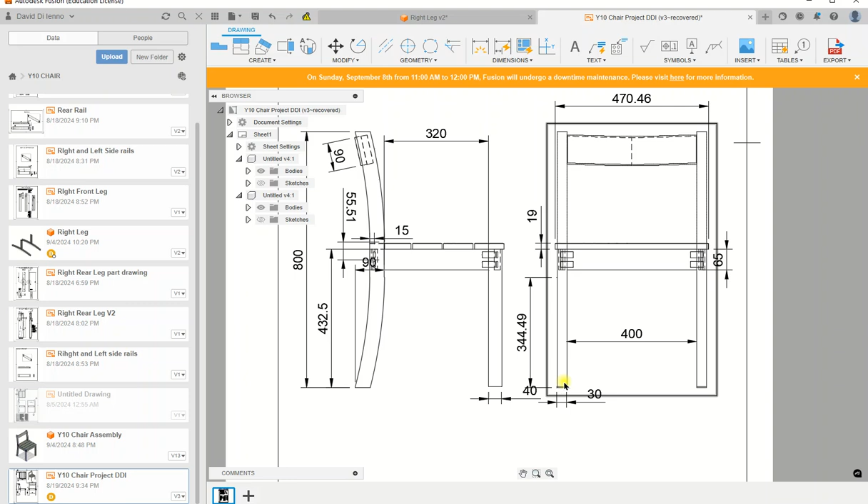Okay, we're moving on now to create the two front legs of this chair. The chair front legs, as we can see from our 2D design, are 40 millimeters on their widest face, 30 millimeters in width, and 432.5 tall from the top of the side rail to the base of each item to the floor. So 432.5, remember that, and 40 by 30.

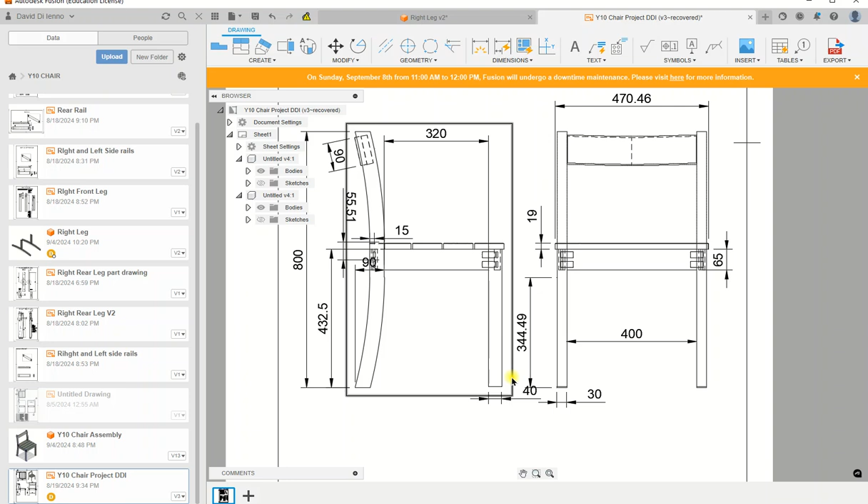Okay, so let's go back and let's do it. Now, some things are probably going to get in our way. We don't want to look at them all the time.

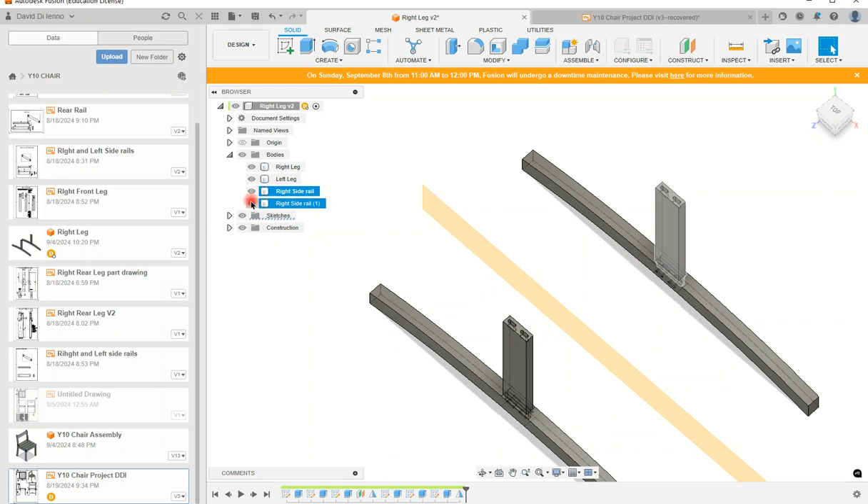As you highlight them, you can see how they highlight on the side here on the menu bar. Let's just turn them off so that we're not looking at stuff that we're not interested in. So we're not interested in that, turn it off and it disappears. Click on the little eye, you'll turn off that leg, and then I think we'll leave this leg on here. Alright, so we're going to do a sketch on this surface over here.

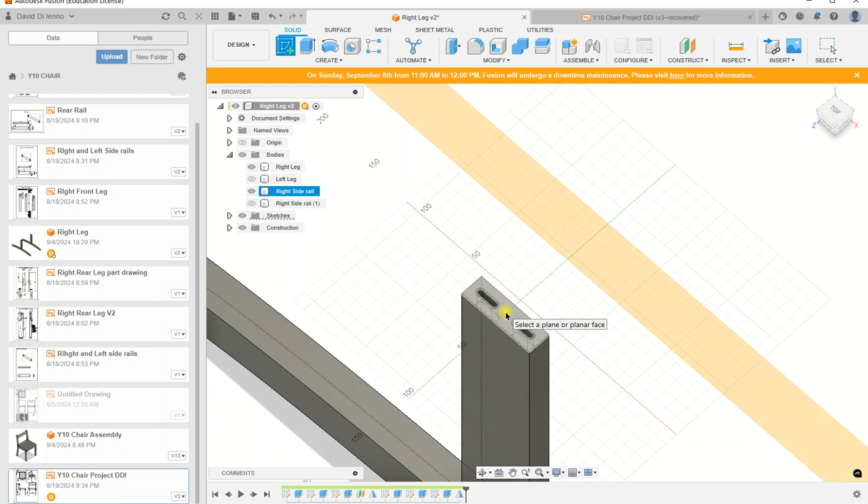So let's highlight it with a sketch. Click on sketch, then where do you want to sketch? I want to sketch on that surface, and now you're in 2D view, which is good. And we know that the front leg is the same width as the rear leg. So we're going to create a 2-point rectangle.

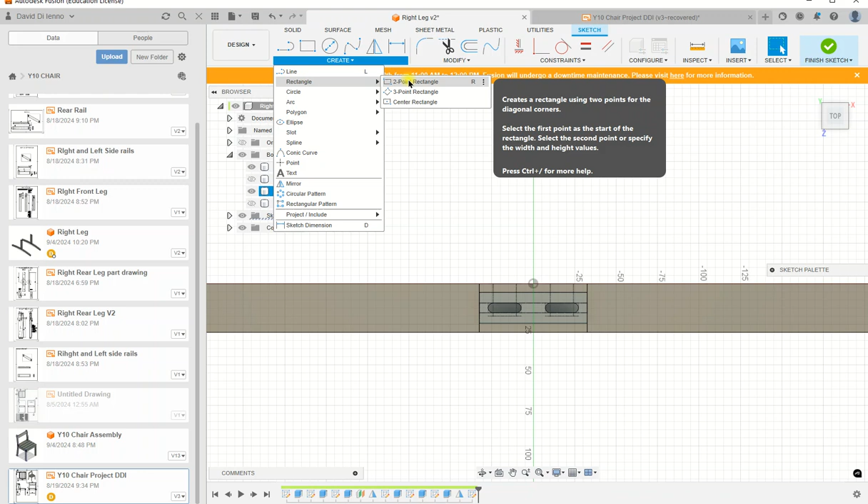That's it up there, or go here, rectangle, 2-point rectangle, which means you select either vertex, the edges of the rectangle, and drag out. So select 2-point rectangle, start up in one corner, and we're going to drag across. Now I don't have to go to the end, because I'm going to tell it how far.

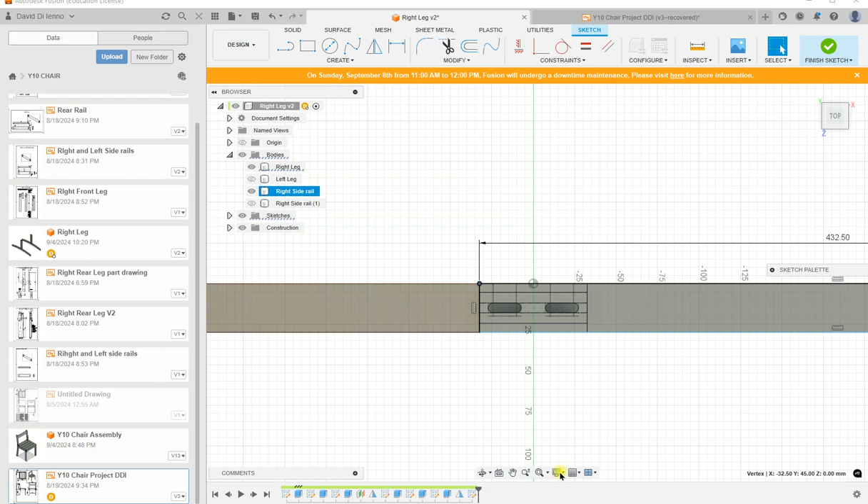Remember, it was 432.5 - that was the length. So hit the tab key and you go to the vertical dimension, and that's 30, which is exactly correct. So hit enter. So what we've done here now, if you click on the fit button, is we've created a shape which reflects the profile of the leg, and it's centered because we're modeling it top down.

Okay, that's good. So now what we need to do is extrude that shape. So let's go to solid, extrude, select the shape. Now of course we also need to select the inner part in here - that's part of the shape. So hold the control key down and select it with your left key so you can select all of the blue shapes. They're all going to be extruded.

We're creating a new body with this, which is important. So make sure you're not joining it, because if you join it, you'll join it to this, and then you won't have a different part. Fusion will think they're all one part. That's not what you want to do, because you want to mirror this part later on, not the whole thing, because we've already got side rails. So make sure that it is a new body that you're doing.

Okay, and then we're going to tell it to go upwards. And do you remember how thick it was? Yep, you're right, 40 millimeters. There you go, and click OK. See how it's changed to join? Be careful with that. That changed there by itself.

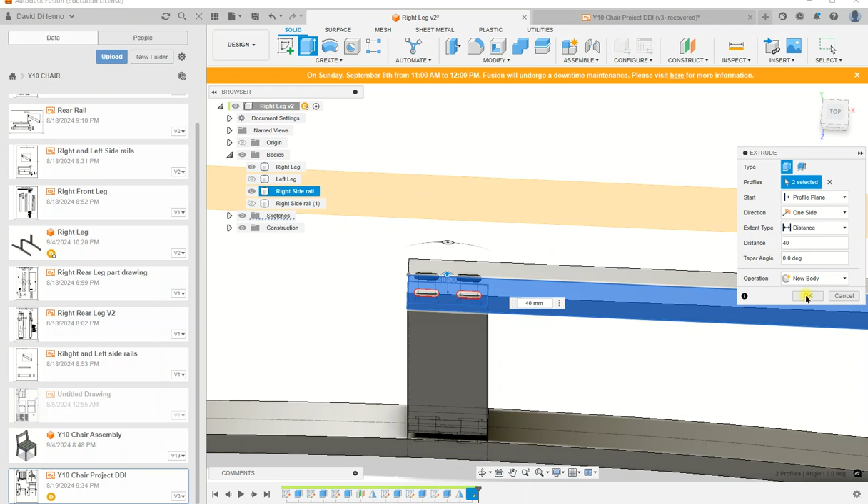It decided that it thought joining this rail to that, this front leg to that rail, that was the idea. Don't let it do that. Make sure it does new body. You'll have problems. You can separate them if you do happen to make that mistake - I'll give you the little clue on how to do that. Go to modify, and then you'll have split body, and you can split the shape. But just avoid that for the moment, there's no need for it.

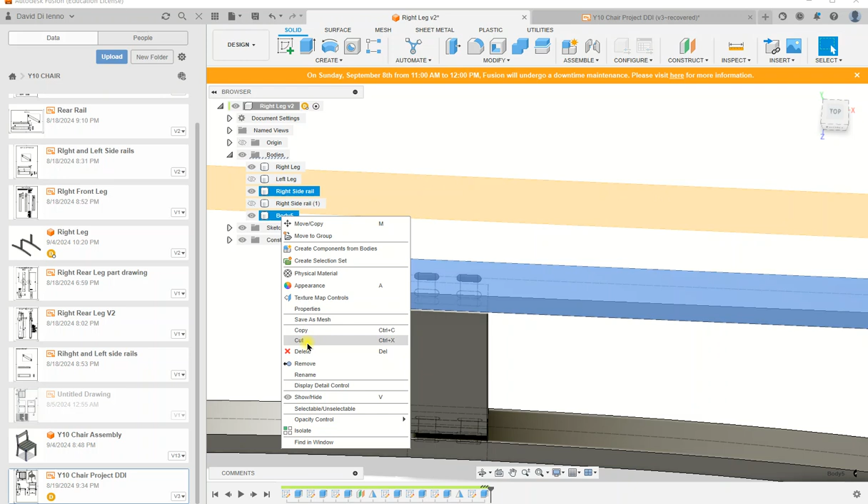So we just created a separate body. It's called body 5 here, and I'm going to rename it by just selecting it with the left button and right clicking, and I'm going to find the rename function. Always name your parts - I'm going to call it right front leg. It'll get confusing if you don't name them, so just get in a good habit of naming all your parts, especially when you get a more complex design.

Now we've got a problem here. We've got these through dowels - see if they've gone all the way through? We don't want that. So let's fix this up now.

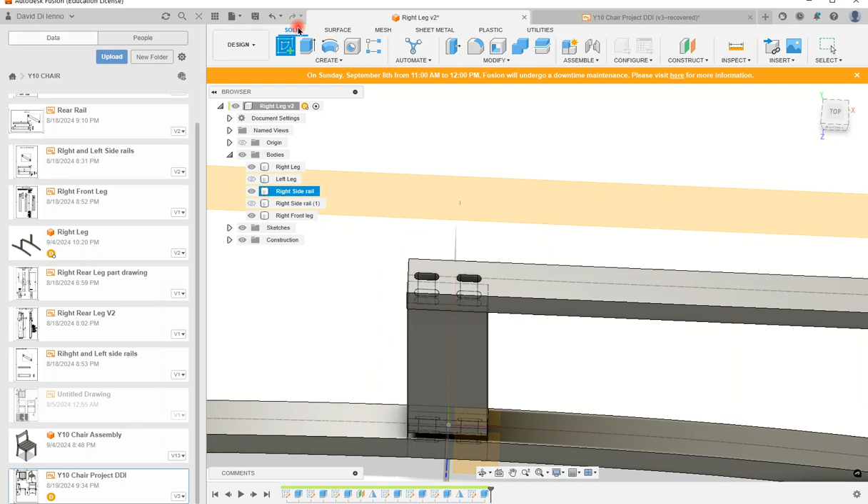We're going to do another sketch, or better still, let's just go solid. And we're going to click extrude, and now we're going to select these two little faces here, these areas that we want to - well, it'll say where do you want to extrude. I selected the major surface. I'm going to hold the control key down and select. Not going to let me, is it?

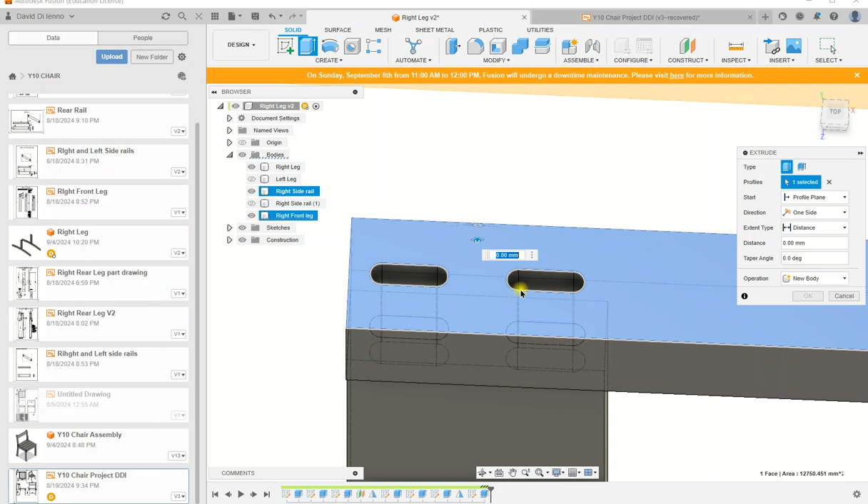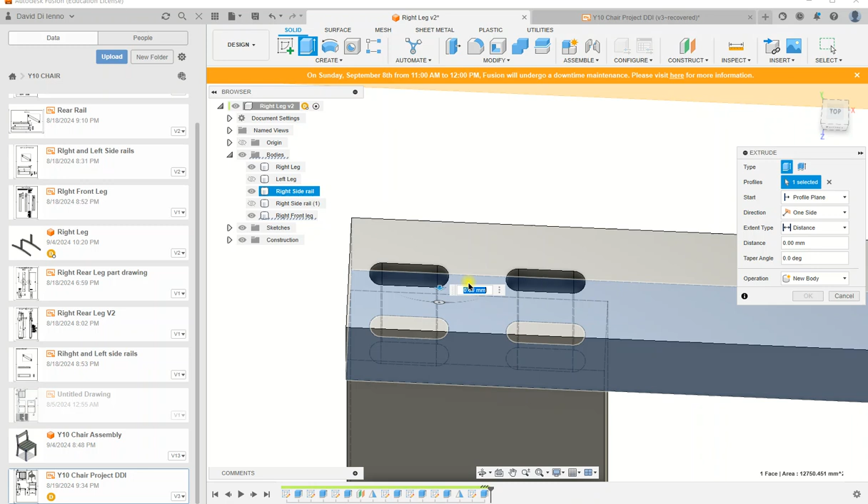Okay, if that ever happens, just hit escape. We want to do an extrude, so let's go just to solid, and we should be able to select that surface. Yeah, so create extrude, and let's see if we can select that rounded section where the dowel is. No, beg your pardon, not so much. All right, so we need to be able to highlight this line.

So I think what we'll do is create a sketch on this surface here.

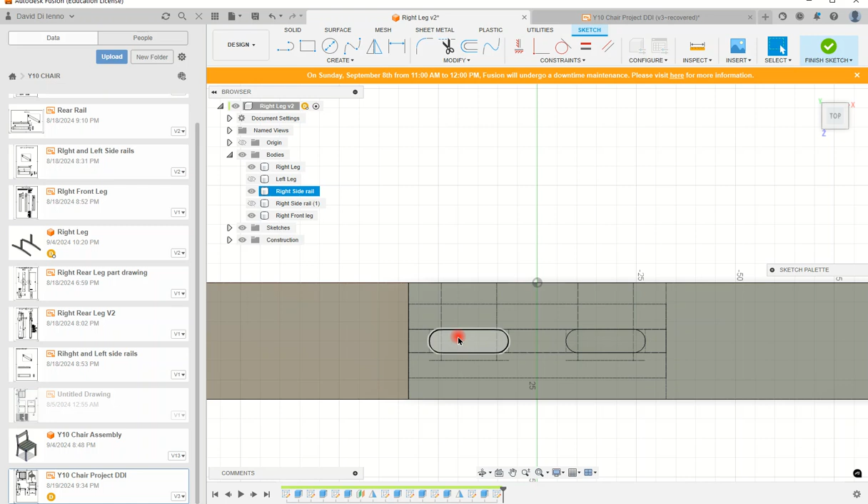And then we're going to highlight this area in here. That's what we need. So select that, hold the control key down, select it again, and this time we're going to be able to extrude. So now I want to extrude, so solid, extrude, and then we want both of these surfaces to go down.

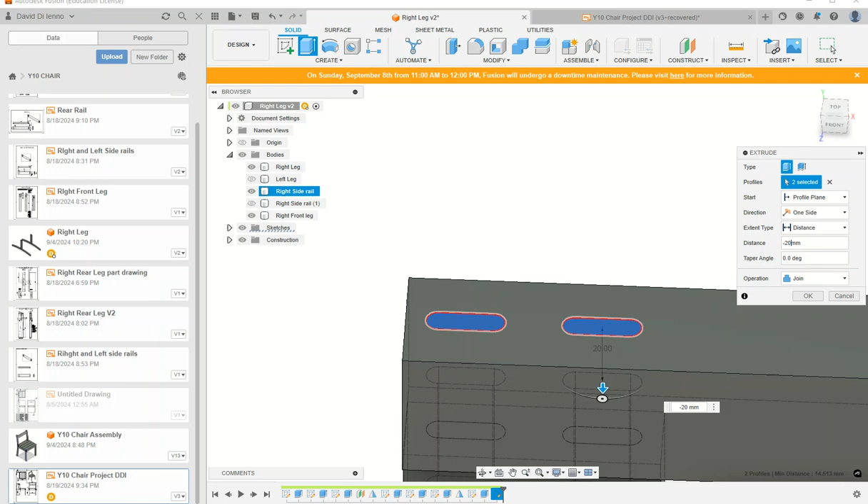Remember, the distance for each dowel is 40 millimeters overall, so halfway through is 20 millimeters. We want the dowel to be filled in 20 millimeters. Click enter. And now we've got that nice firm front that we wanted.

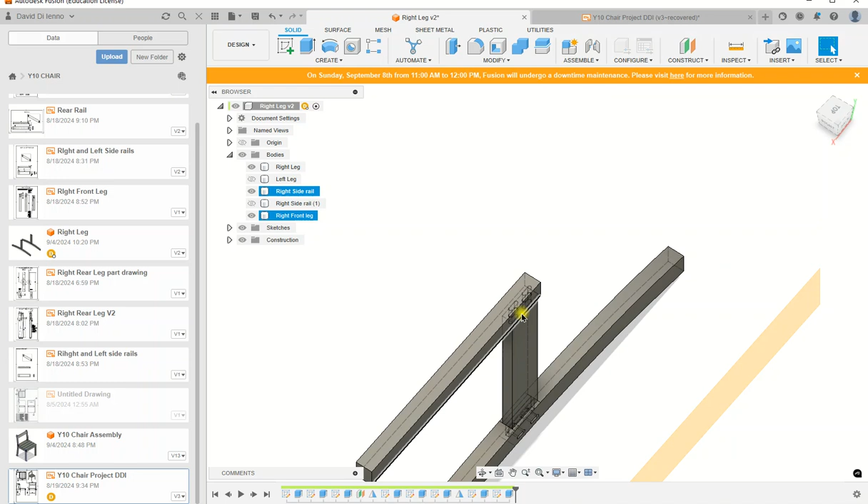Okay, next thing, let's go and do the movement to the side. We're going to create the dowels in from the side because we need to have dowels coming in this way to secure the front leg. Sorry, the front rail. Okay, so let's do those dowel holes.

We're going to do a sketch. So create a sketch on this face this time. There it is. Now if it's in the wrong position, just get the pan handle and pull it down. Okay, here we go. And so now what we can see here, these are the two center lines for the slots, but the actual end points are the ends of these two horizontal lines. Because it's a curved surface, you don't see it as well.

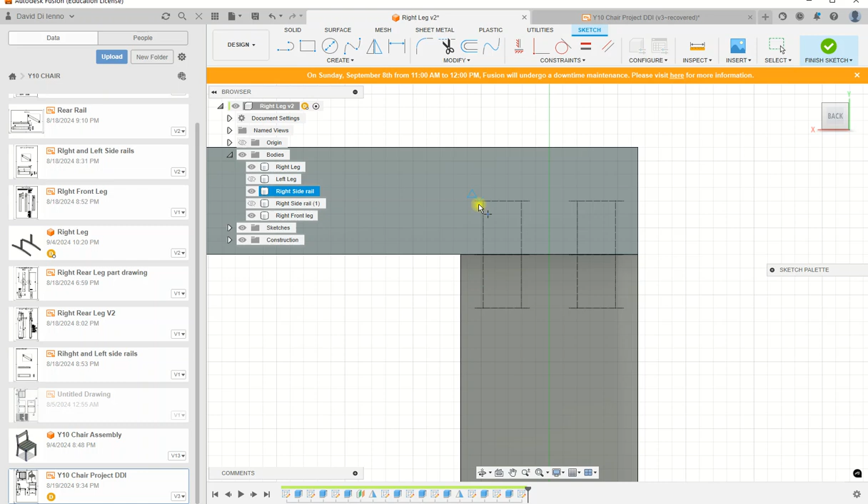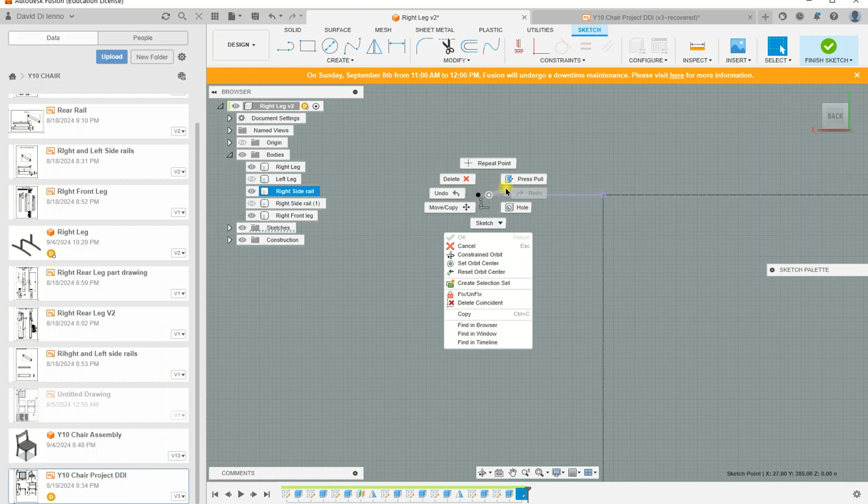So I know that if I create a point, just go for a point, on the end of these lines, so one right there, one right there. Is this one right? No, not in the right spot. It's actually there. Okay, so I'm going to get out of point function. I'm going to highlight that point and I want to delete it. I don't want it there. Don't leave stuff hanging around that's not in the right spot.

Now if I've done this right, that distance between these 2 points should be 20 millimeters. So let's just double check it from here. Get the dimensioning tool. It's 20 point. I'm going to make it 20. All right, 20 millimeters. There it is.

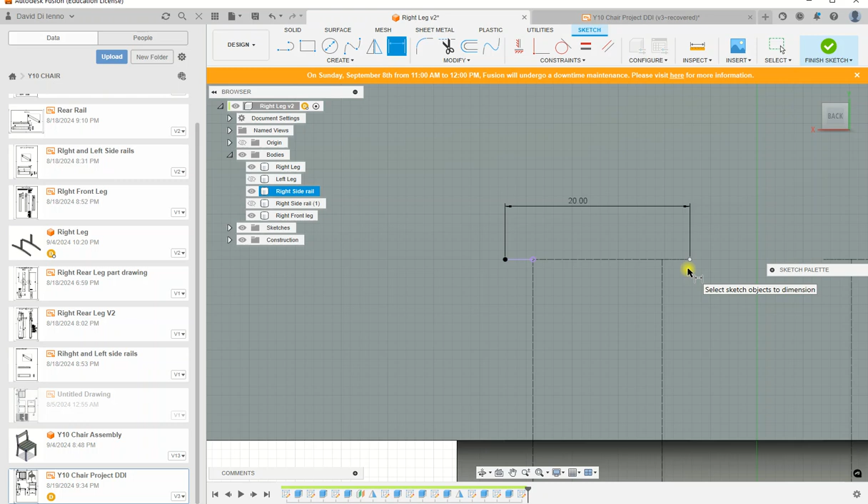Beautiful. Okay, let's go across here and do the same thing on the other side, because I'm going to use those 2 points as guide posts for my slot that I'm going to create to go into the center, to fix on the front rail. So let's go in there now, drag it across a little bit so I can see the other section, and I'm going to place in here my other 2 points.

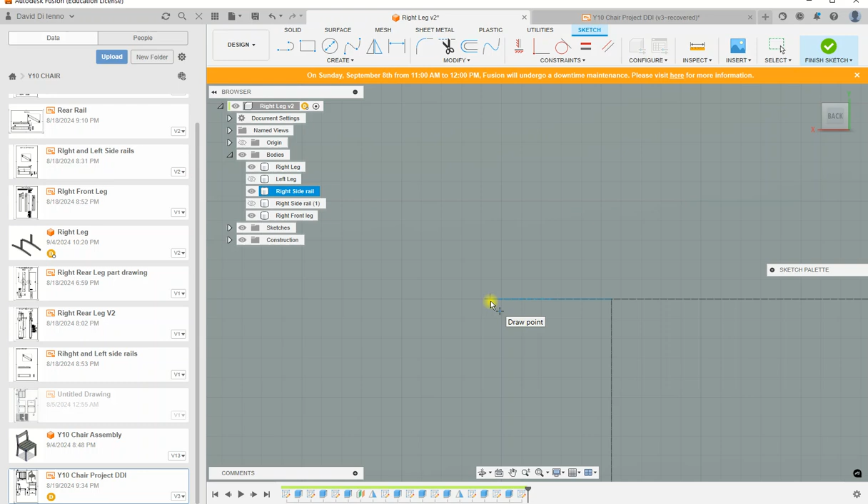Now the points are very important because just get in close if you need to so you can line them up. There you go. Go across here and line up there. Cool. And that should be 20 millimeters as well.

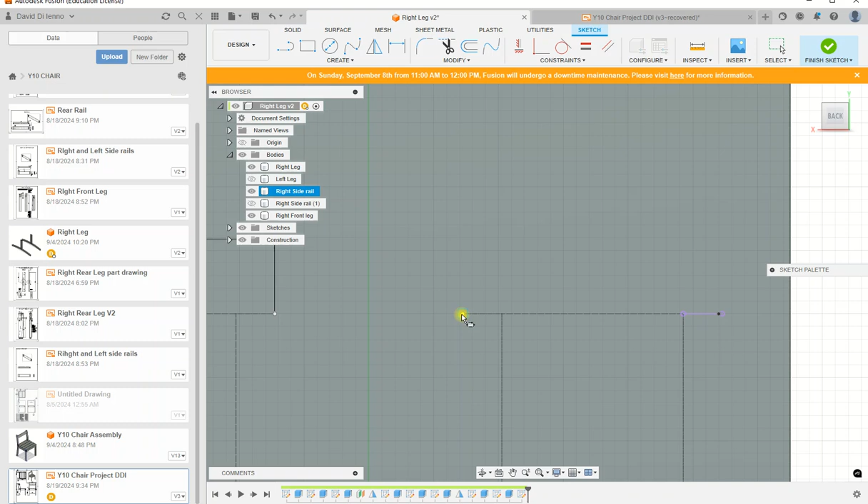So now let's go to our slot function, go down here to slot, and we're going to create an overall slot. Remember, overall took us from one end, click on it, to the other end, left mouse button, click drag out, and it's 6 millimeters, and that's our slot. Hit enter. Beautiful. And we're going to go down across to the other one, drag it.

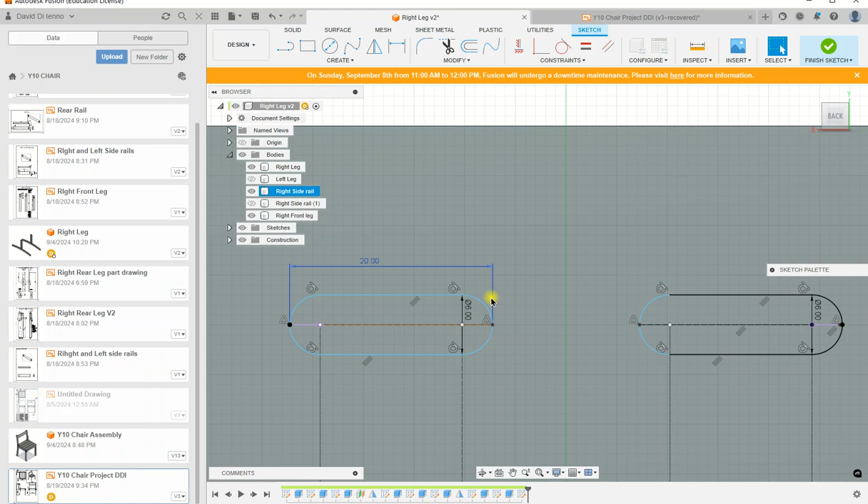It's a bit annoying having to drag it, but we will. Same thing, create a slot. You could mirror those 2 slots if you set up a mirror plane like along this line in the middle, but I'm not going to bother. I'm just going to do them. Overall slot, one here, one there, and 6 millimeters. Done. All right, cool. So I'm panning back out now.

We've created the 2 slots for the dowels that are going to go in from the side. Oh, that flipped up very quickly, didn't it? Okay, it's on this side here. There they are. Beautiful. All right, in there.

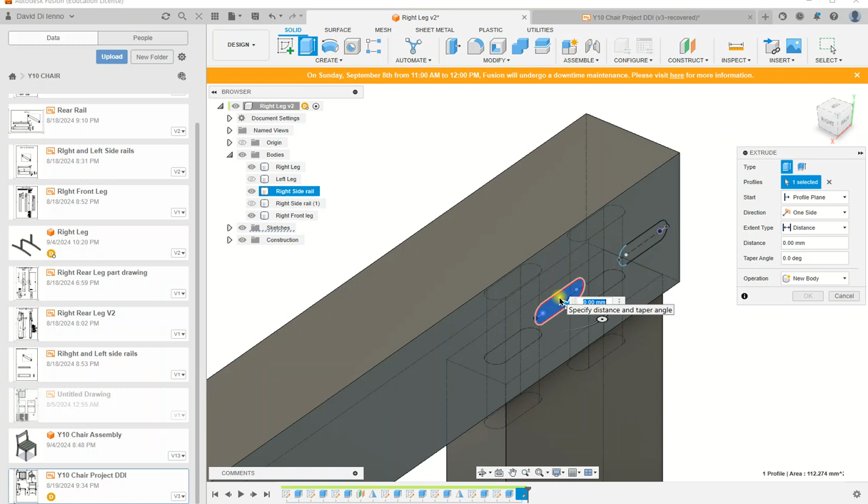Let's extrude those in by 20 millimeters. So we'll go solid, extrude, we'll select that section, control key this section, drag them in because we're going to be cutting, and we want to go in by -20 millimeters. Now you might find that you'll probably end up cutting into the dowel that's already sitting there from the side rail.

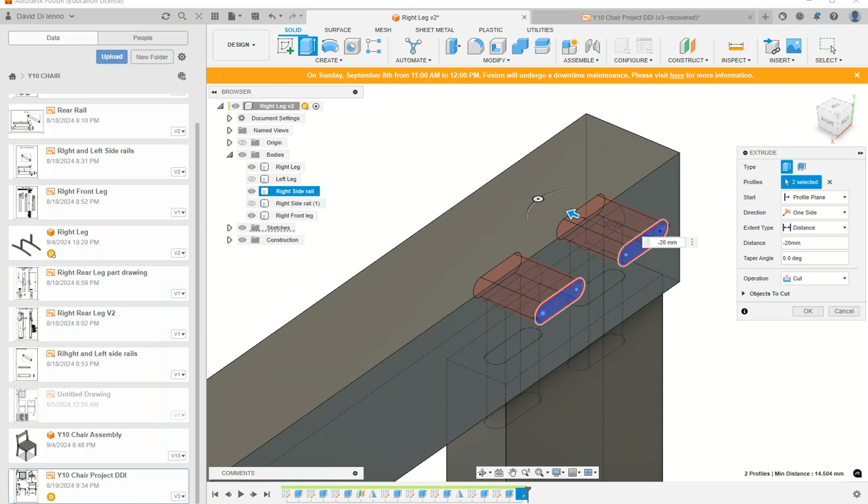Well, you know, there's a couple of ways around it. You can shorten one of the dowels if you want. You can miter them. There's all sorts of possibilities. But at this point in time, I'm just going to click OK, and I've got my legs set up in position. Okay, and it's just modeled nice and correctly.

Let's make it fit so we can see. And now comes the beautiful, beautiful thing, because I'm going to turn on the other items that I've turned off there. I just switch them on by flicking on those eyes on the left. And now we're going to mirror, and that's why this center plane was so useful now.

Because let's go to our mirror function. I think it's under create and mirror. There it is. Good. And it'll ask me, well, what do you want to mirror? And I'm going to select a body. And now I'm going to select this body here, that one.

Now, had it been joined to this side rail, I would have been selecting both of them where I couldn't choose. And that would have been a pain, because I'm going to have two parts superimposed on top of each other, and that is not going to be good if you ever have to 3D print or do something like that with this model. So don't do that.

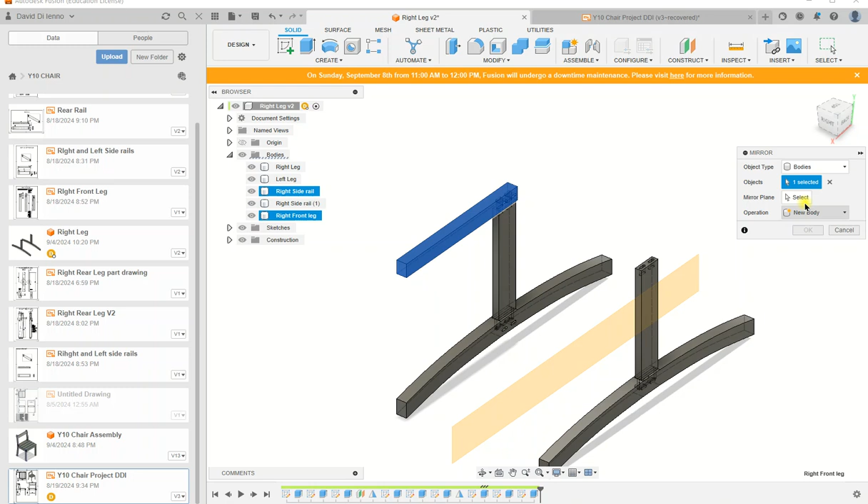Now it's going to ask me for the mirror plane. I'm going to tell it this is a mirror plane, and look at that, it's just lobbied on there straight away. I click OK, and I've modeled my two legs in position.

And now the next stage will just be to do the two side rails. And those two side rails are just simple, simple, simple to do. And I'll show you how to do those in the next video.